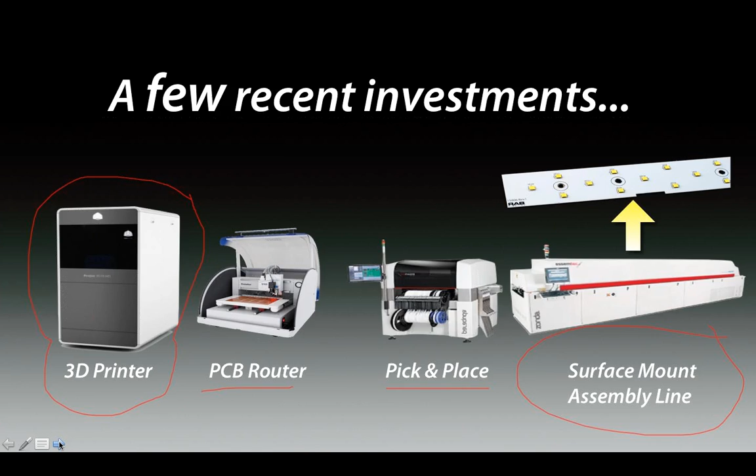We've added some big time investments at RAB headquarters in our test facility. We have 3D printers, PCB router boards, pick and place LED chip machines, surface mount assemblies. What all this investment does is helps us come out with innovative products more quickly so we can get them to you so you can stay ahead of the competition and really lead with RAB.

Here's some of the awards we've won over the last few years. 2014, our ALED and FX LED 150s won the Money Saving Product Awards by Building Magazine. We won the Progress Award from the IES in 2013 for high efficacy fixture. We've won Product Innovation Awards for our goosenecks, bollards, and garage fixtures. This is important to us.

Member organizations, we are very active in IMARK, and I believe we were Supplier of the Year the past 2 years for IMARK. So that is really cool. And we're also very active in the NAED as far as providing training, support, funding, all of that stuff to the electrical distributor industry. So keep that in mind.

RAB's been around since 1946, so we have a long history. We started in the Bronx, New York, right about here. This was a rough neighborhood back in the 40s and 50s. People were breaking into RAB headquarters and stealing typewriters. And so about 20 years ago, we decided to move across the river to a nice neighborhood called Northvale. And we've been expanding the facility there for the last 20 plus years.

We were ranked fastest growing company in New Jersey just last year, I believe, or this might have been 2013. But that's a pretty big honor considering the amount of large manufacturers and just companies that are based out of New Jersey.

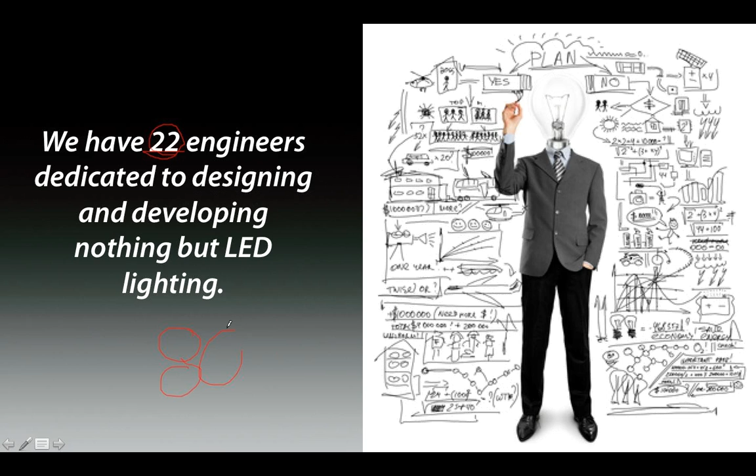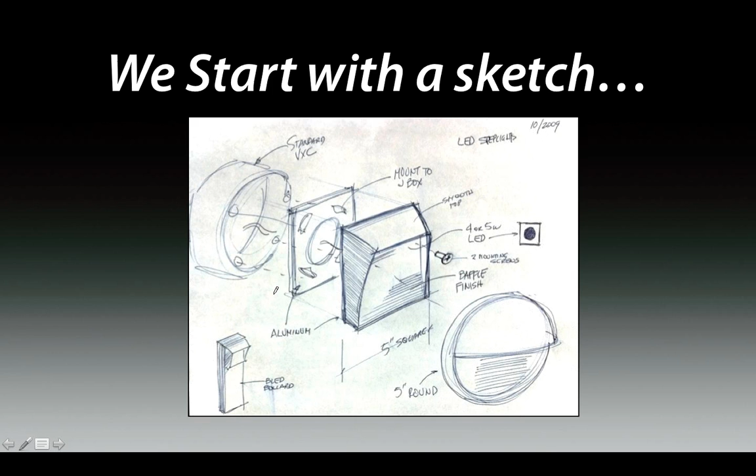We have 22 engineers that work on our product design and LED design, and this is only LED. 80% of our sales is now LED lighting. That's awesome. We did over $4 million in research and development last year for our LED products. That's a big time investment to come out with quality products. And everything we do starts with a sketch, and we build it from the ground up to ensure that you're getting a quality product and not just some LED chips and components shoved into a 1980s housing.

Nothing wrong with the 80s, though. I was born in the 80s.

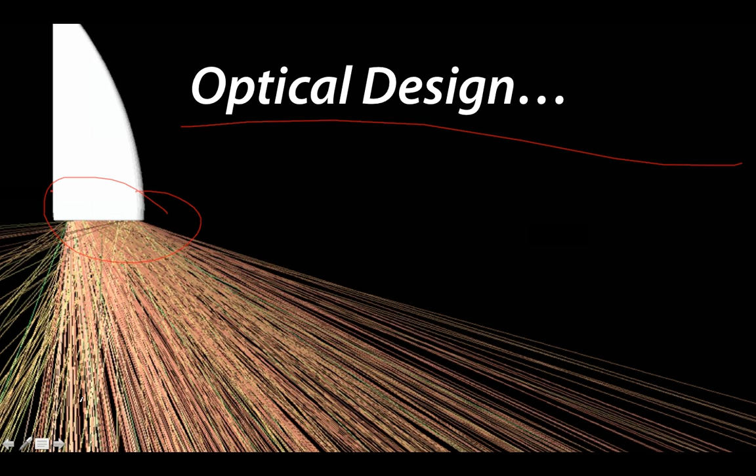Anyways, optical design, we do that all at RAB also. All the photometrics and everything are designed to put the light where you need it and not have wasted light. Everything from RAB is UL listed. We don't ever use ETL or any other standards. We use the highest standard, which is the UL quality test. When it comes to manufacturing, we've converted our facility to a lean manufacturing facility.

Basically, in a nutshell, we used to have these long tables that stretched across the whole plant floor, and it was great for producing a lot of one SKU. But in the developing world, with all the different changes in LED color temperature and output and options, going to this U-shaped pattern, we can get shorter runs and turn around production time a lot quicker.

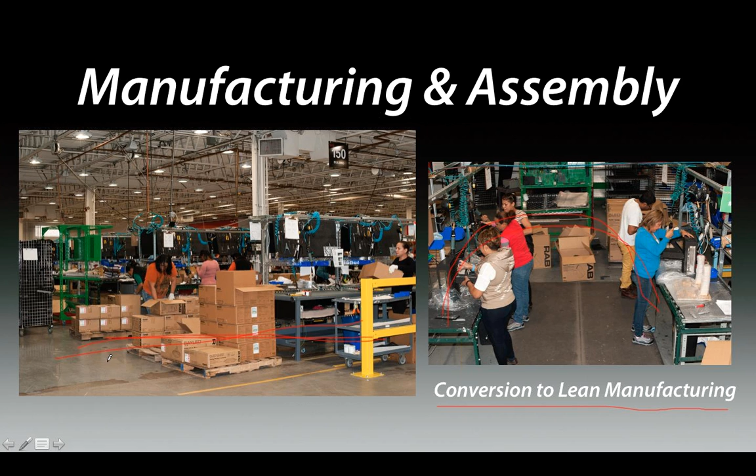So if you need a custom fixture with a 480 volt driver and a photocell and a neutral color temperature, we can throw 6 pieces on the table and have it out very, very quickly. Also, there's a lot of efficiencies and cost saving factors by going to a lean manufacturing facility. And of course, we have high quality packaging that fit well on your counter displays and help sell the product to your customers. We make lighting easy.

This is our whole philosophy, and we start by answering the phone. You don't have to press a bunch of buttons to get connected to the proper people. You can actually call, check on pricing, availability, all of that stuff, and we pick up in the first couple of rings, and the person that answers the phone can answer your question. You're not going to get transferred 100 times.

This is an advantage, I think, for stocking distributors because you become the go-to source for this product, and the fact that you have it in stock locally means that people can get it quickly and they're not having to wait for supply to come in from an external rep warehouse or someplace where we might ship it to you. So this is great. You can be the go-to source in the local market for our product.

We do have a warehouse in California and also a warehouse in New Jersey. Those are RAB-owned warehouses. The rest of these warehouses are all rep agency warehouses. When it comes to merchandising, I think we have one of the better displays out there. It's got the integrated iPad. A lot of your locations have this. If there's any that don't, let me know, and I want to get them set up.

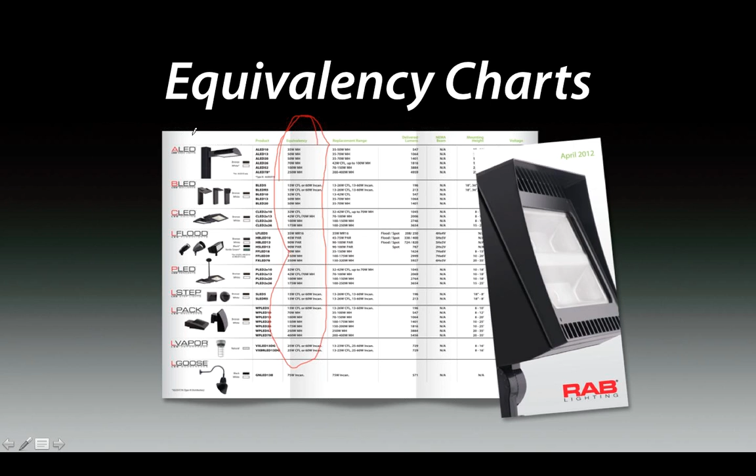Online training. Equivalency. This is a question that comes up a lot, and hopefully you guys are getting more comfortable answering it. But you have to remember that lamp lumens are not the whole story. And when we put together these equivalency guides, we've gone through some lighting science steps to come up with what our fixtures are equal to based on their application, based on what type of fixture they are, whether they're a flood, area light, and so forth.

And with LEDs, they use absolute photometry versus relative photometry. So if you're not familiar with the term, relative photometry is used in traditional light sources, and it has a lot to do with the ballast and lamp and how they interact with each other. So for example, you could have a fluorescent tube that is published at 10,000 lumens, but you could have a ballast that only has a ballast factor of 0.8. You're not going to get 10,000 lumens out of that lamp if the ballast factor is only 0.8. You'd need a 1.0 ballast factor to get all the usable lumens out of that light.

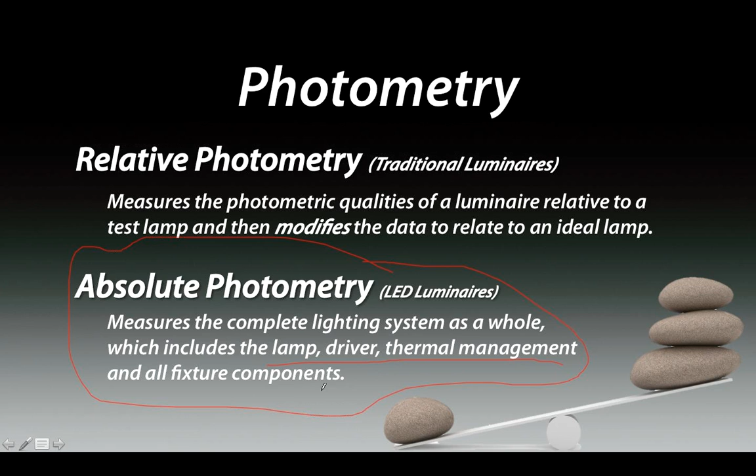So if the ballast is a 0.8 and the lamp is 10,000 lumens, you're going to get 8,000 lumens out of that lamp. That's your traditional relative photometry. You can think of it this way, as relative to what lamp you're using, what ballast you're using, and what system it's running in. With LEDs, the whole system is measured as one complete system. So the driver, lamp, thermal management, heatsink, everything is listed as one complete unit. You don't have to rely on doing calculations.

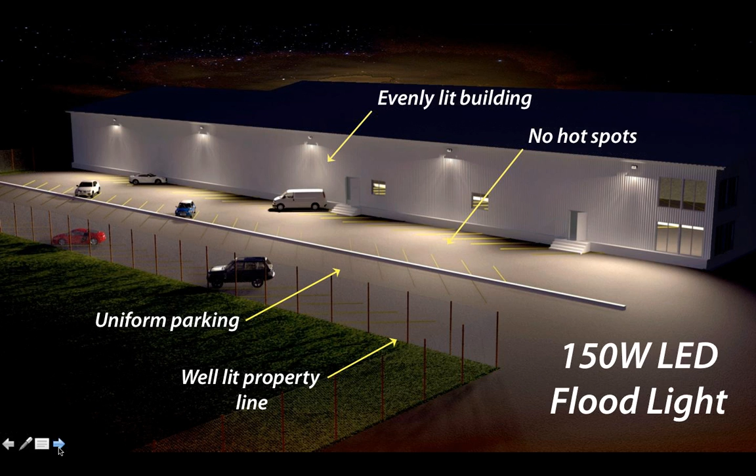So here's a rendering in AGI which shows a 400 watt metal halide flood, and as you can see there's a lot of wasted light. There's some extreme hot spots. There's some dark areas near the property line. And if you look at an LED solution with our 150 watt flood, what you're getting is more even illumination across this area without the hot spots and the low lights and so forth. So you've got an evenly lit building, no hot spots, and a well-uniformed parking lot.

Now, one thing I recommend: if you sales guys have a light meter and you go out and you test before and after, make sure that you're taking your readings in multiple areas and then averaging them out, because this is part of the parking lot, which is very dark. Here you're going to have an extremely high number below the fixture. And what we try to do with our layouts and designs is create even illuminance across the area at the IES recommended levels. So instead of having 10 foot-candles here and 0.2 here, we might try for a 1 foot-candle average across the whole area. It's going to be much better for your eyes. It's going to be much better for cameras and everything else to stay focused and see what's out there.

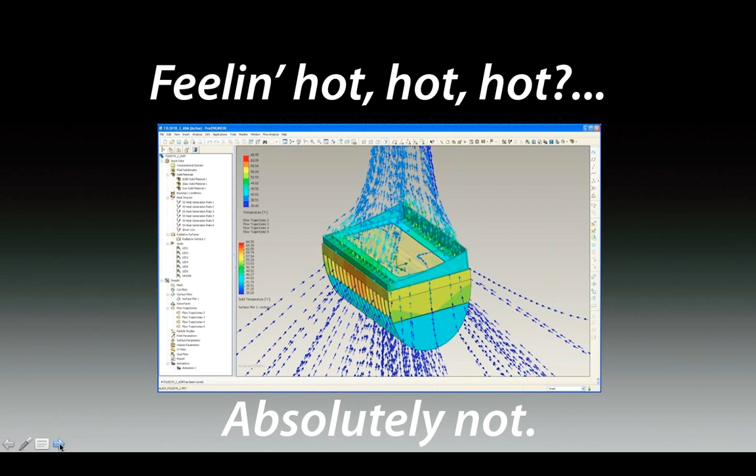So some of the things we do to test our fixtures: thermal fluid dynamics. We see where these things get hot. We have a driver in a separate box. The LEDs are here. When they heat up, the air can flow through there. We do our own reflector design.

This is a really important slide here. I want to point out, this is our RAB 26 watt fixture compared to one of our competitors, 30 watts. Now, you might think, oh, 30 watters are going to have more output than 26 watt, right? And we'll look here, the lumen output. It, in fact, does have a little bit more, 1 lumen more. So we're at 2648. The competition's at 2649. But that's not the whole story.

If you look at the photometrics side by side, both of these units are mounted at 22 feet up. So each grid square is a multiple of 22. So this number 1 is 22 feet, 44 feet, and so on. So you look over here, they're almost reaching the 3. We've exceeded the 3 with less wattage on our fixture because we have better optics in the fixture.

Now, if you look at the Slim 18 compared to the competitor's 20 watter, we've actually got a lot higher lumen output. At 1909, we're at 91 lumens per watt. That's a really good efficacy versus 68 lumens per watt over here. So again, side by side at 2 mounting heights out. Now keep in mind the mounting height is different here. Here we've used 14 feet. So this is going to be 28 feet out. At 28 feet out here, they've just broken the 0.5 foot-candle level. We're at 1 foot-candle, twice the light at the same distance if you read this across like this.

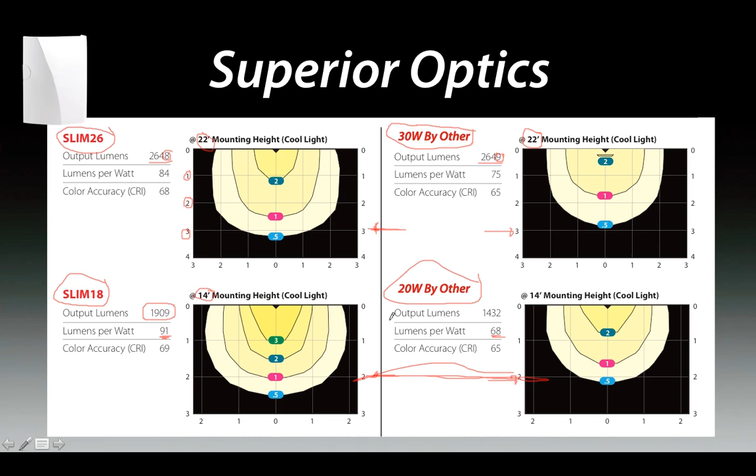So what I'm saying is, don't only look at the wattage and don't only look at the lumen output. Really compare the two side by side with efficacy and optics. Many manufacturers will provide their photometrics on their website, so you can really compare them side by side.

Now let's talk about product for a few minutes. We do have a new fixture. It is a Class 1 Division 2 fixture. It's called the HAZ LED, and we have 57 years of experience with hazardous fixtures at RAB. We actually had some incandescent vapor tight hazardous fixtures on the space shuttle launch pad back in the 70s and 80s when NASA was going strong.

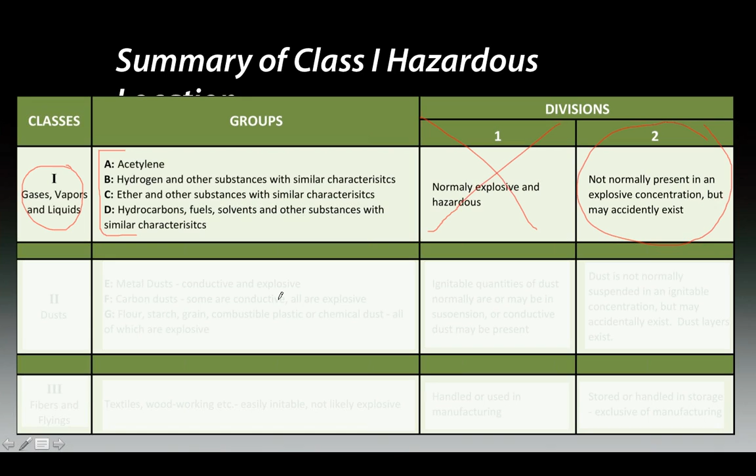This new fixture is LED, and it's Class 1 Division 2. And if you check your National Electrical Code, you can find out exactly what areas these are good for. I will show you in general. A Class 1 fixture is gases, vapors, and liquids. There's different groups available for different types of fuels. And we are not Division 1, we are Division 2, which is gases, vapors, and liquids that are not normally present in an explosive concentration, but may accidentally exist. So keep that in mind and make sure you check with the facilities person to get the exact classification that you need.

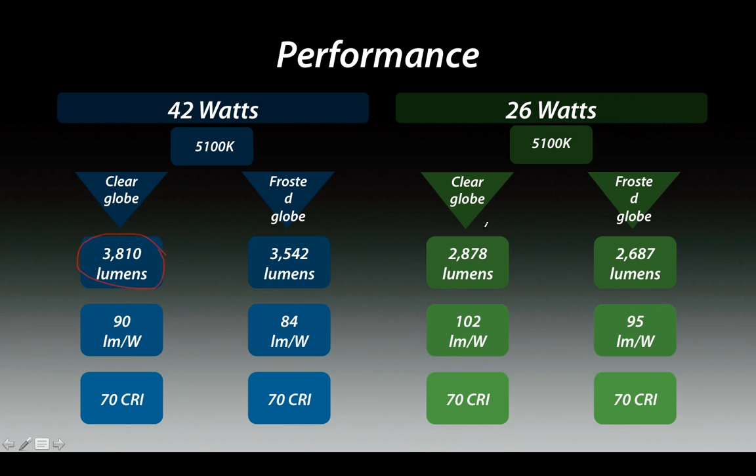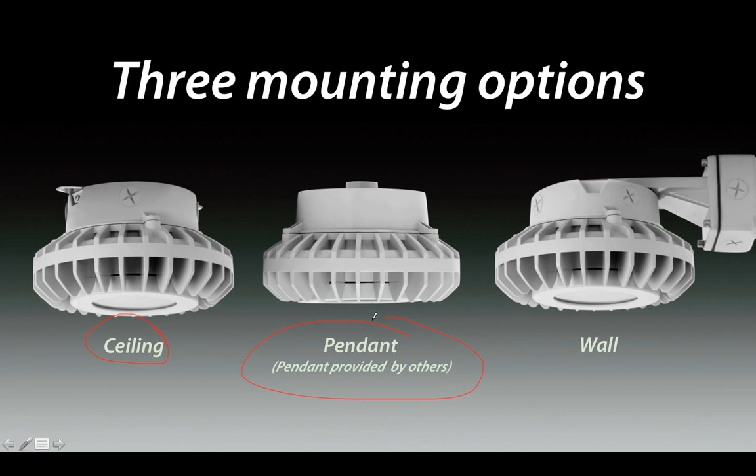We do make our fixture in 2 different wattages, a 42 and a 26 watt, both with very nice lumen packages, as you see here. The 42 watt, based on the absolute photometry that I was just explaining to you, is equal to a 100 watt metal halide, and the 26 watt is equal to a 70 watt metal halide. We make these in a ceiling mount, a pendant mount, and a wall mount. So choose your fancy. They're all great.

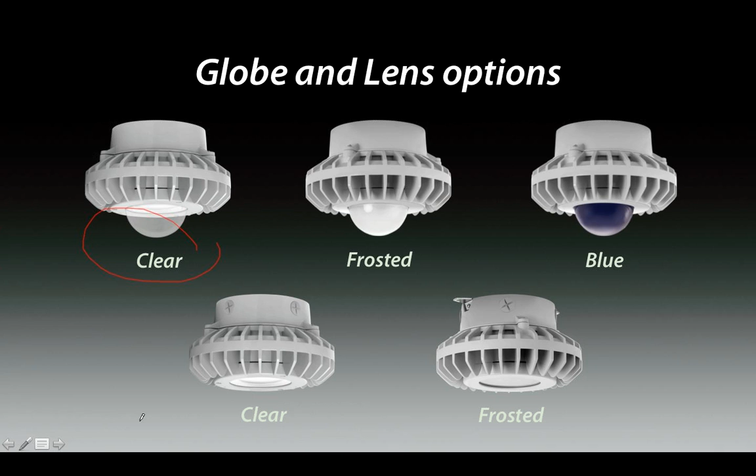Also, different globes and guards are available here. You can see you can get it with a clear, frosted, blue, clear. This clear without a bubble is going to be the highest lumen output number. If you go to a frosted globe, of course, that blocks a little of the light output. If you go to a really heavy guard, like this die-cast guard, that's also going to block some of your light output. So the most efficient is going to be a clear globe without any guards. You can also do wire guards. You're going to block a little bit less light.

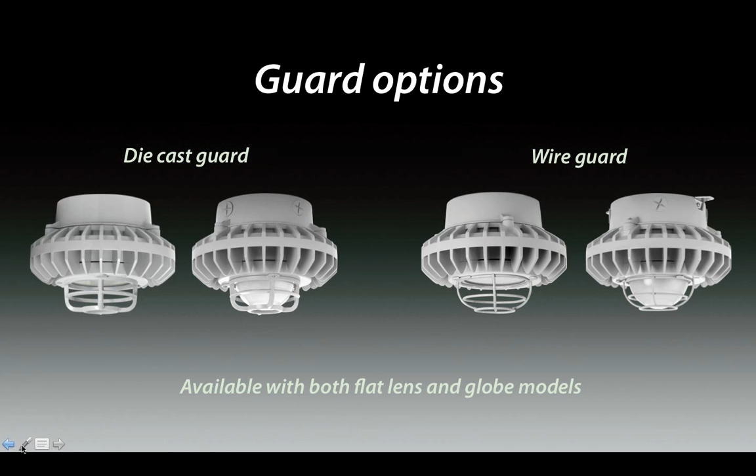These have a durable polyester powder coat finish, high-grade silicone gaskets, and a Class 1 Division 2 rating. Great for vibration and shock areas. IP66 is a full washdown listing with pressurized water jets. It does have some T codes. If you're familiar with the temperature codes here, you can look on our spec sheets and see the T codes.

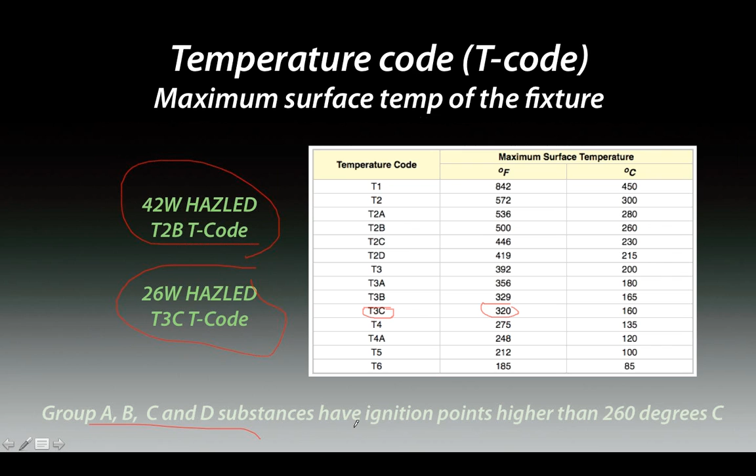For the 26 watt, for example, it's this one here, T3C, which is an external temperature of 320 degrees, and these are good for groups A, B, C, and D. Note that ignition points are higher than 260. There you go. So bottom line, check with the facility person, make sure you're giving them exactly what they need for the application.

Hey, I want to tell you about our high bays. We've extended the line. We now have a 104 watt. So those of you that had success with the 78, we now have a bigger, badder, awesome unit. The 104 is equal to a 320 metal halide based on the system that I showed you guys a few minutes ago on determining absolute photometry. So I know a lot of people were hoping for a 400 watt equivalent, and I'm sure a lot of people will use this to replace 400 watt equivalents. But according to the lighting science breakdown that we did, we felt a 320 was the closest match that there is. These are DLC qualified.

I want to talk to you next about our skeet product. This is available with pallet quantity pricing, which we have not advertised or shown to anyone. If you're interested in finding out about this, talk to me or talk to your rep about this. It's a pretty aggressive price break if you bring in some quantities on this product. So talk to us about that.

It's a great product. It replaces these incandescent porcelain sockets. You can put them in closets. You can put them in residential garages, laundry rooms, basically anywhere where you don't have a lot of space. This can also fit on a pancake box. It has a little mounting bracket about this size. Put your wires through there, and then the fixture turns on with a half twist, just like a smoke detector. So single gang box, pancake box, as I mentioned. There's no driver sticking up inside of here, so you can fit it in a very low profile area.

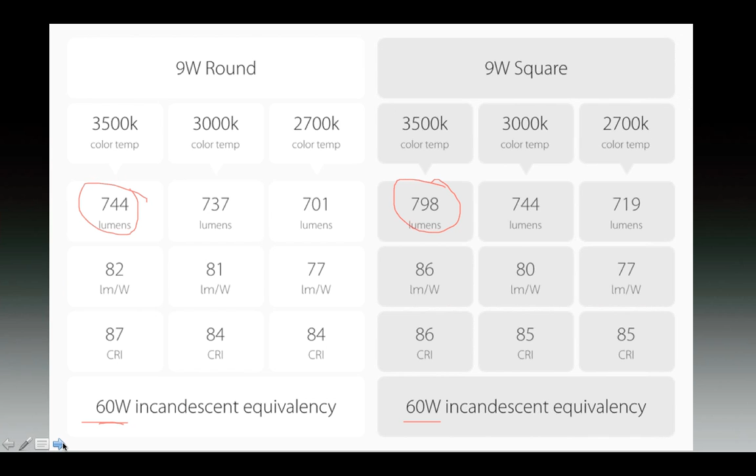How many are on a pallet of those skeets? You know, this is a case quantity. Did I say pallet? If I said pallet, I'm sorry. I meant case quantities. I think 6 come in a mini master, and then I think 4 packages of 6. So a case would be like 24 pieces. So talk to us if you're interested in case quantities and things. We can move quite a bit on the price on that.

So I forgot that I had you guys unmuted. Thanks for chiming in.

So with the troffers, which I'll talk about in a few minutes, we have actual pallet quantities, but you probably wouldn't buy a pallet of skeets because that would be like a lot. They're pretty small.

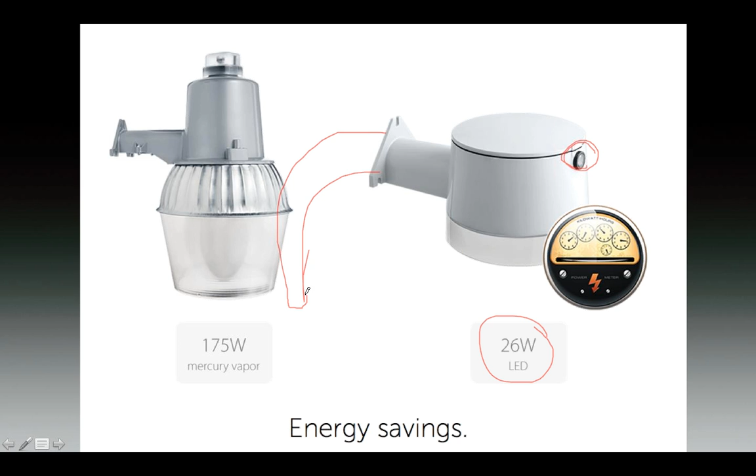Improvements here to the Yard Blaster line. You guys stock this 26 watt in a lot of locations. It comes with a 120 volt photo eye. You can get it with a 24-inch arm off of it too. This is a great product, but people have been asking us for this, a new photo eye option. So this is available with 277 compatibility.

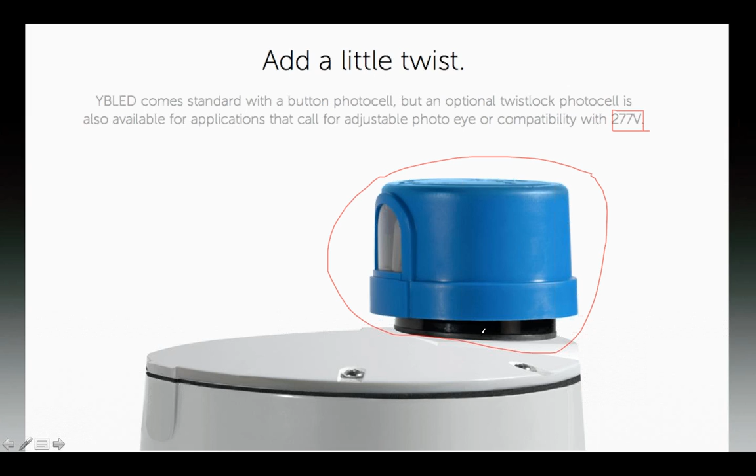And if you're selling to like utility or a municipality that has the trucks that go around and services these, a lot of times they want a photo eye that they could potentially replace. So let's say 6 or 7 years down the road, the warranty's over. They want to be able to just go and swap out a photo eye. This might be the way to go for them. Or you could even upsell them to a photo eye that has a higher warranty or something like that.

Want to show you guys some of the newer floods that we've come out with. This FF18 and the FF39 are two of our top 5 best sellers at RAB. So what did we do? We added some in-between wattages. We've added a 26 watt now and a 52 watt for higher output. All 3 of these models here come in the FF39 housing. So same style that you're used to, additional wattages, and we've also made additional beam patterns available.

So if you want more of a spotlight out of these, you can order a 4x4. The traditional version is a 7x6. It should be a 6 here, a typo. Slip fitter and trunnion mounts available, as well as the 1/2 inch or 3/4 inch swivel. The 18 watt is still in the same smaller housing as it always was.

Look at the lumen output on these guys. If you remember the 39 watt, it was never this bright before. We've actually upgraded the chips on the 39 watt, and we're now getting 112 lumens per watt, which makes it our most efficient fixture in the RAB LED lineup. If you had somebody that was buying a lot of 39 watts and liked the light output, you can now give them the 26 watt. It's going to cost less, give you the same lumen output or similar as the previous 39.

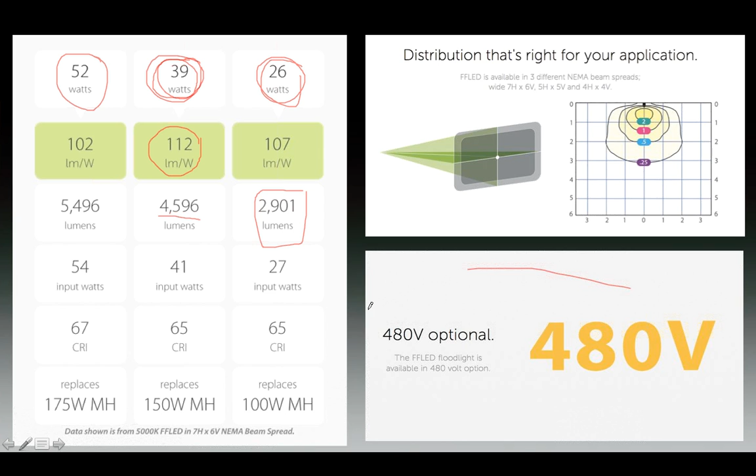These 3 wattages are also available in 480 volt as an option, which we never had before on smaller floodlights. That's awesome. And different beam patterns. 4x4, 5x5, 7x6. This is the 7x6 pictured here. 4x4 is going to give you more like a spot forward.

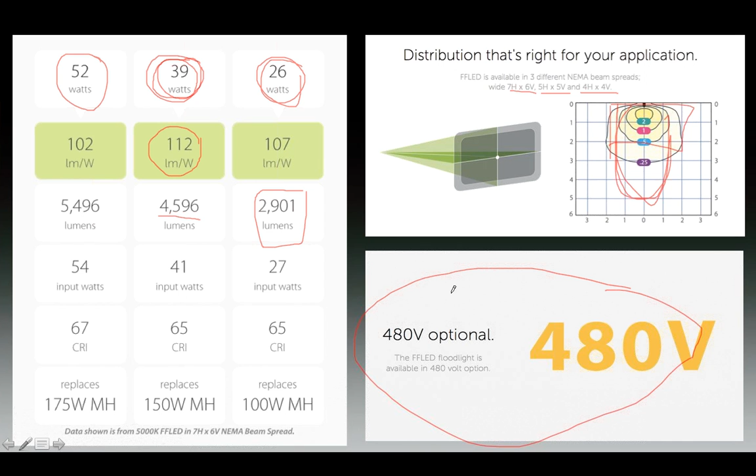These are great for building facades. They're great for little signs when you come into town. State champions, 3 years running, whatever it might be. Museums, hotel signs. Here they are used in a unique application on the top of these buildings. 110 of them around these buildings in Seattle.

Here they are at an amusement park, with all the vibration and shock of the roller coasters. They're just using these as accent lights to shine around. You can see them on all these pillars. Pretty cool. University campuses, whatever, you name it. This has been a great little floodlight for us. It's no wonder it's in our bestseller, and it's even better now that we have additional wattages available.

When it comes to the really big floods, then you can jump up to this package, and this size housing you can get all the way from a 78 up to a 150, and 480 volt is available in all of these, and we can also do 0 to 10 volt dimming in these now as well. When it comes to these floods, you can get them in trunnion, slip fitter or with polyguards, wire shields, and as I mentioned, if somebody wants to control them with a low voltage dimming system, we can do that as well.

We've added a canvas light to our floodlight arsenal. This takes the same housing as our Easy LED 78, which is a spotlight for 80 to 100 foot flags, water towers, you name it. This one's been designed with a wide beam pattern and a nice rectangular pattern. So if you've got a 5-foot setback on a sign, you can light a sign that's 14 foot wide by 8 foot tall with a single fixture. No hot spots. Very evenly lit, even on the edges of these signs. So excellent choice for all those highway and billboard signs on all those Lamar advertising opportunities out there.

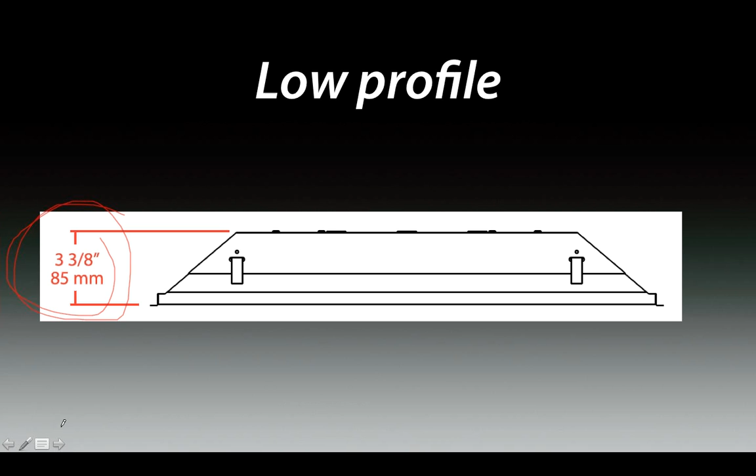So please talk to me if you're interested in that, or talk to your rep, and we'll get you the confidential information on that. These are great for schools, dollar stores, convenience stores, quickie marts, office environments. They're very low profile, only 3 3/8 inches thick. We have optional drywall kits if you're putting it into a hard ceiling.

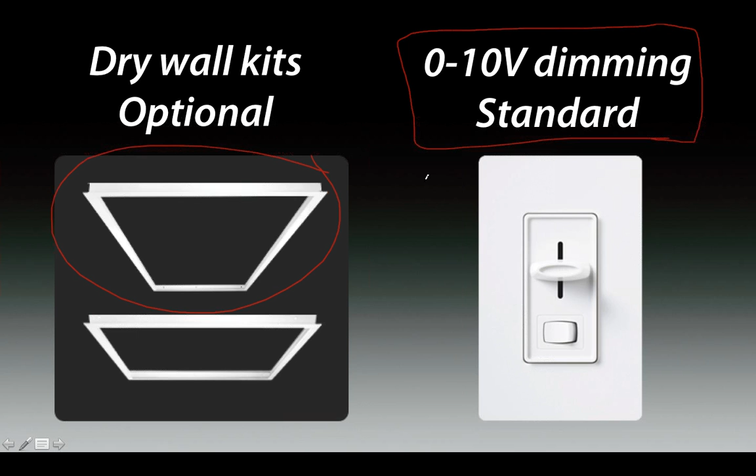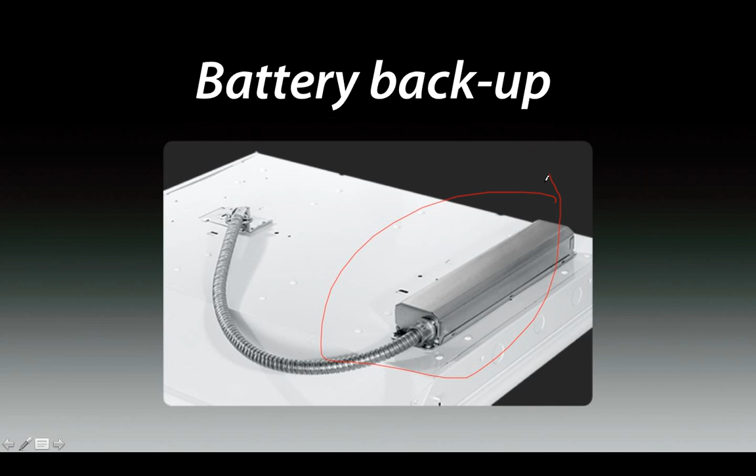Every unit comes standard with 0 to 10 volt dimming. So if you're putting it in a conference room, you can easily dim that down. We have battery backup available. So if you're in a nursing home or something and they need to have battery backup to meet life safety code, they don't necessarily need to put in a whole generator system. They can just put backup on a select number of fixtures and meet the requirements there.

Let me review the slim line for you real quick. The 12, 18, and 26 watts have been very popular. These are now available with 0 to 10 volt dimming. I wanted to bring that up, and they're DLC listed. They're IP66, that's wash down, for up or down light.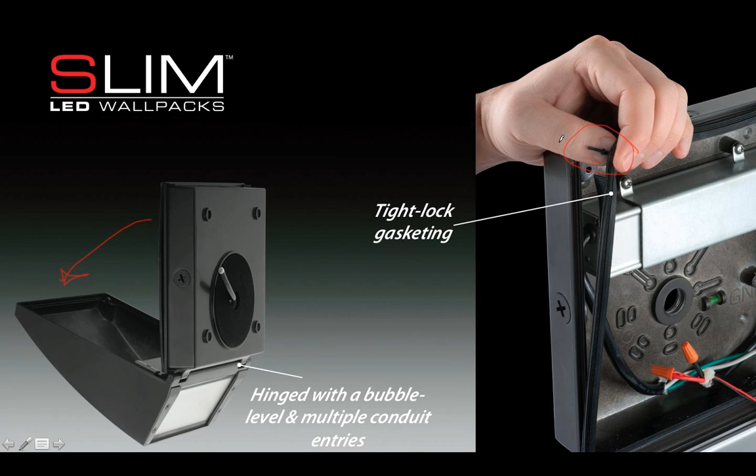This hinges down. It's got a tight lock gasket, so you're not going to pinch a gasket and have leakage problems like some of the old HIDs that were out there. It's got a bubble level for easy install. And the whole idea here is when you're taking one of these down, you're doing retrofit business,

there's going to be a mark on the wall, or maybe they painted several times or something. This is going to cover up all that mess, and the contractor is going to be able to move on to the next job, have a 5-year warranty, and 100,000-hour life expectancy.

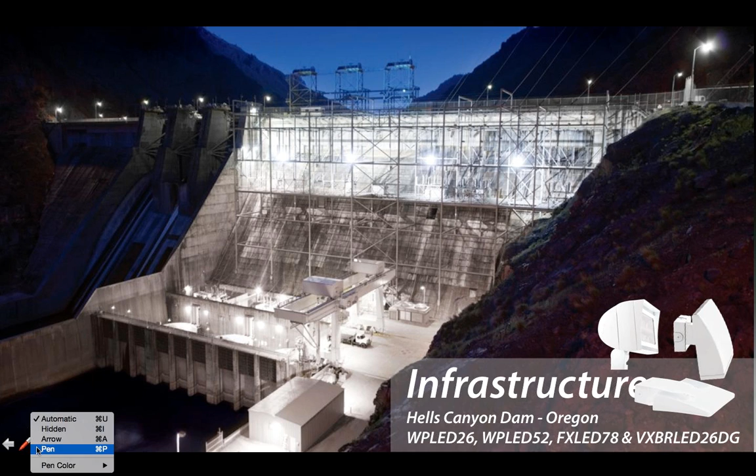We are looking at some improvements. We've made some improvements already on the 52 watt. So prices remain the same, but lumen output has increased on that fixture. And we've added 480 volt in the 104. So a lot of great things happening with our wall packs. And you can see sky's the limit as far as applications. Here they're used on the Hells Canyon Dam in Oregon.

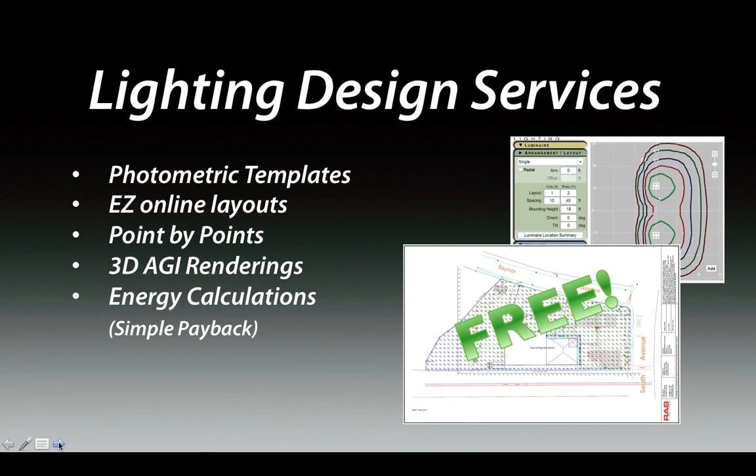So that brings me to our lighting design services. Remember, we have 13 full-time professional designers on staff with knowledge in electrical codes, lighting ordinances, all that dark sky stuff. So if you have an opportunity, feel free to send it over to us. Let our design team lay it out for you. I know Brady and Rex, you guys have used this before, and a lot of people within your company use this all the time. Keep using it, man. It's great. We love to do it for you.

We can do the energy analysis worksheets like you see on the screen here. We can do AGI renderings. Just gather the information up. You can submit it right on our website, or you can email our lighting designers directly, or send the information to your reps to help you submit it. The more information we have up front, the better we can design these things for you. And these are just a couple examples of some goosenecks on a wall, rendered out. Here's an indoor environment.

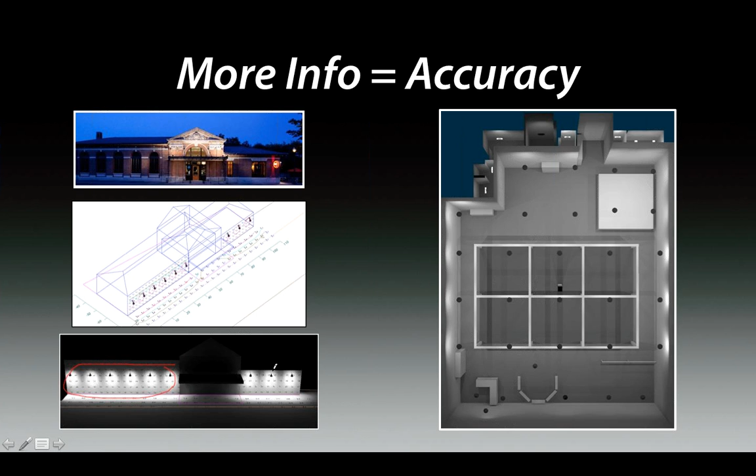If we get a CAD file from you or a PDF document, we love it. We can turn those around really quickly, but we do work off of Google Earth, and I know some of you guys use this all the time. You can mark the pole locations for us, let us know the mounting height, how many heads they have on it, and there are ways within Google where you can use a snip tool and select certain areas and then mark them yourself using a highlighter pen or something that you have on your computer. More information you give us, the better. You send it off to us, we'll do the layout.

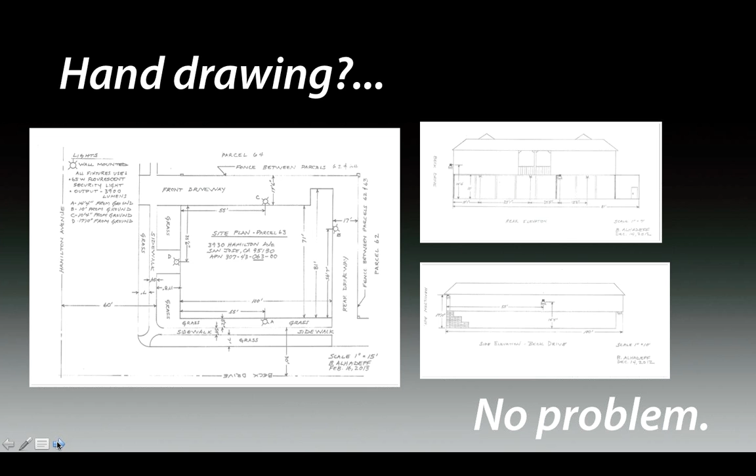We also work off of hand drawings like these or napkin sketches like this. This looks like something I would submit when I'm out in the field walking the job. 20-foot mounting height. We got 31 fixtures. We got a drawing that's completely out of scale, but it doesn't matter because we have dimensions. And away we go.

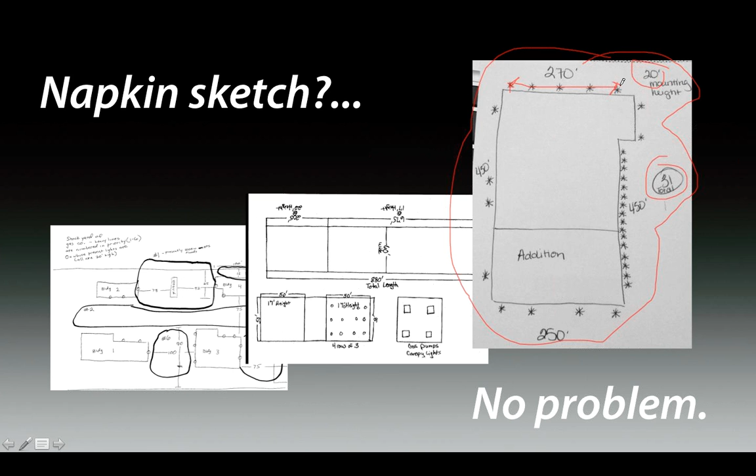Here's some examples of some of the high-end lighting layouts we are capable of doing. The simple stuff, we can do these point-by-point layouts, or you can jump right on our website and use our online photometric calculator. Sometimes this doesn't mean a lot to people. They're like, I don't know what these numbers are. What am I looking at? So we do this for you also.

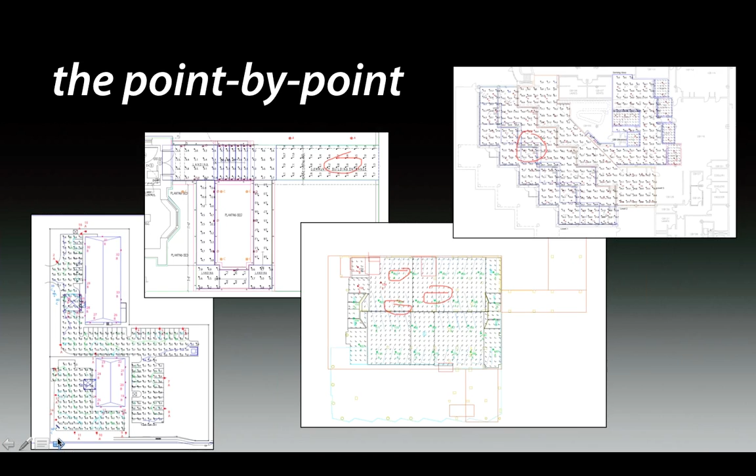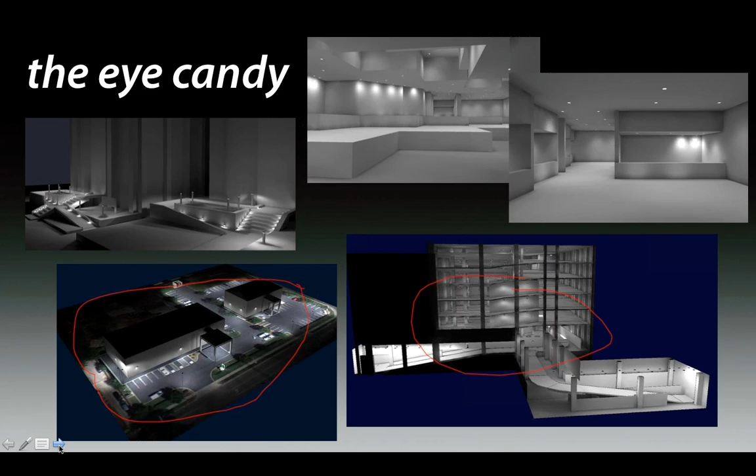This is where we render it out in 3D. We call it the eye candy. It's what really sells end users if they can see their building at night with their actual trees and texture lit up to IES recommended practices, your parking ramps, you name it. Provide us with the information, let us know the deadline and some details, and we will work to get this to you for free. 3D modeling, we have a guy on staff that does all this complex modeling.

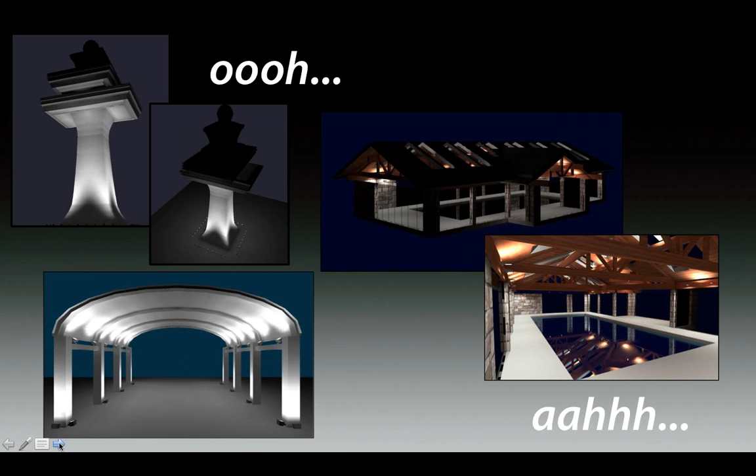We have Revit files available for our fixtures. So if you have an architect or engineer that wants to plug it into their structural system, they can do that. We'll give you all the ooh and ah stuff that you need to sell this job. It makes a really great fireworks display also. Here we go. Here's an example. We did this layout for this customer, and here it is installed. You can see our fixtures exactly where we told them to place it, and it just looks super cool.

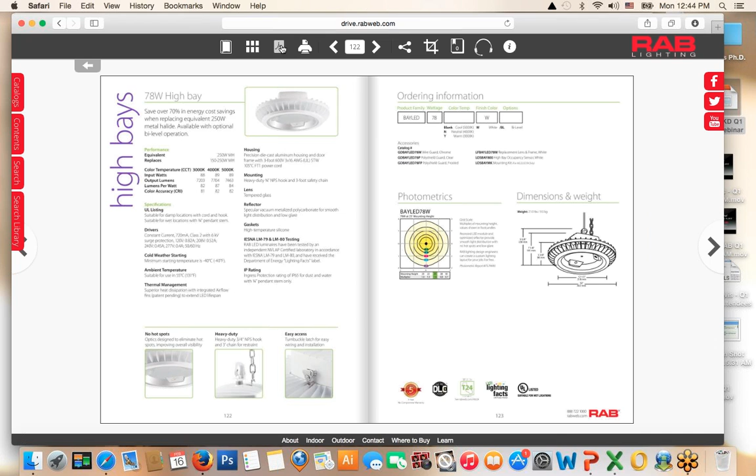So pretty cool. Those are embedded right in the catalog. You can play them from your iPad or tablets or whatever you want. If you want to send somebody a PDF of this page, in the past you could go to the RAB website and get the spec page, but sometimes people would want color photometrics and things like that. This has a PDF generator. If you click right here, you can include the cover image or not. I usually don't, but you can hit submit. It'll create a PDF of that particular page.

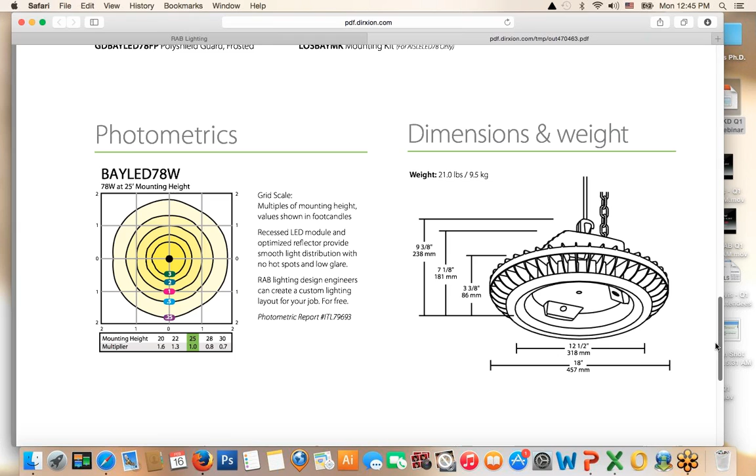Here we see it. Nice color page. It shows all the details that you wouldn't get from a black and white spec page on rabweb. Boom, there it is, all the dimension drawings. And you can, of course, then save that PDF on your computer, email it to your customer, whatever. It's just that easy. Flip through, find the product you want, export it.

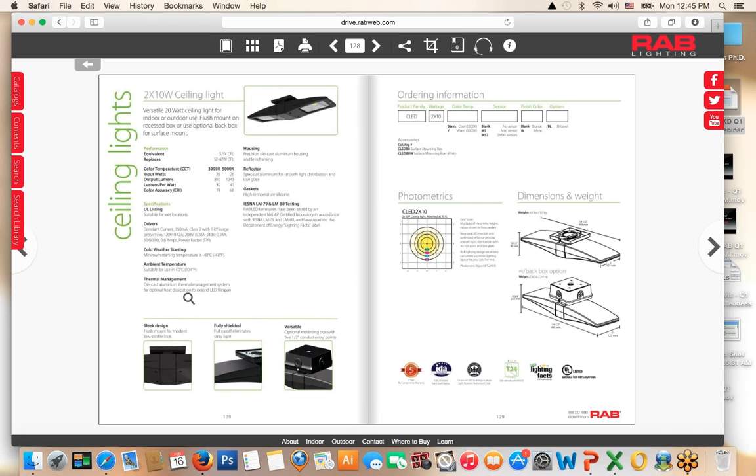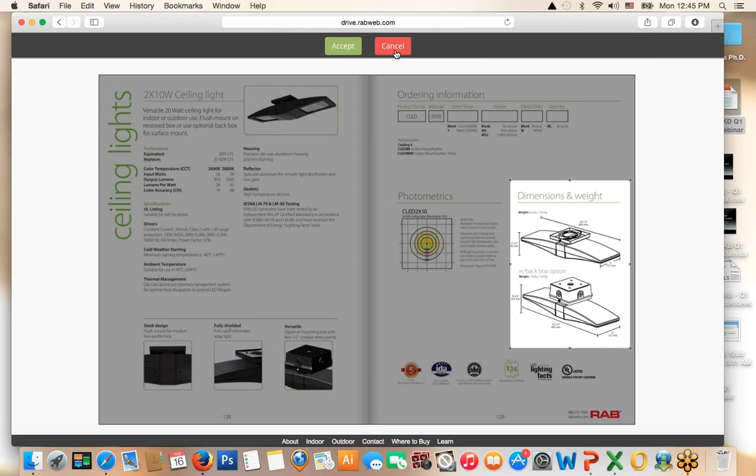If maybe you want to just send the photometrics or somebody wants to see the dimensions, you can use the snip tool. Somebody just wants the dimensions here. You can snip that. You can hit accept. You can download it. Put it right in an email message or whatever you want to do right from this Drive website. So remember, it's available as an app, and it's also available just if you type drive.rabweb right into your browser.